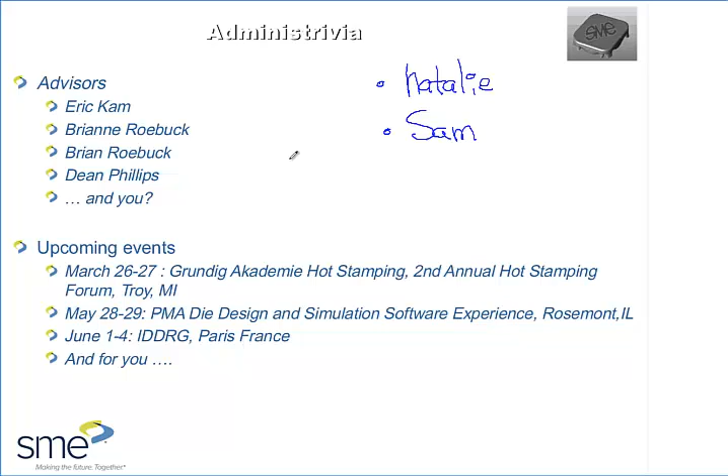So today we have, in addition to the usual suspects, Natalie and Sam. Sam has been joining us almost a year and a half — Sam, you've been coming to our meetings? Yeah. You will, if you keep paying attention like that, we might sneak you in and try to con you into becoming one of our advisors. Yeah, it's not as bad as we make it sound, but just don't leave. Okay, we won't do it, Sam.

My name's Eric Kam. I am the co-chair of the Stamping and Dies technical group within the forming and fabricating community. My co-chair is Brianne Roebuck, who you've heard talking in the background. Her father, Brian, is an advisor, as well as Dean Phillips. We are the folks who try to, on a regular basis, make sure that meetings happen within the forming and fabricating community, specifically talking about stamping and dies.

As far as calendar of upcoming events, a couple things on my radar: on March 26th and 27th in Troy, Michigan, a company called Grundig, a metalworking, metal forming supplier to the automotive industry, is having their Grundig Akademie Hot Stamping Forum. This forum, hosted in conjunction with General Motors and the General Motors supplier community, as well as Grundig Akademie, my employer Autoform Engineering, and a couple other hot stamping suppliers, is a 2-day forum that will have educational technical talks on the first day.

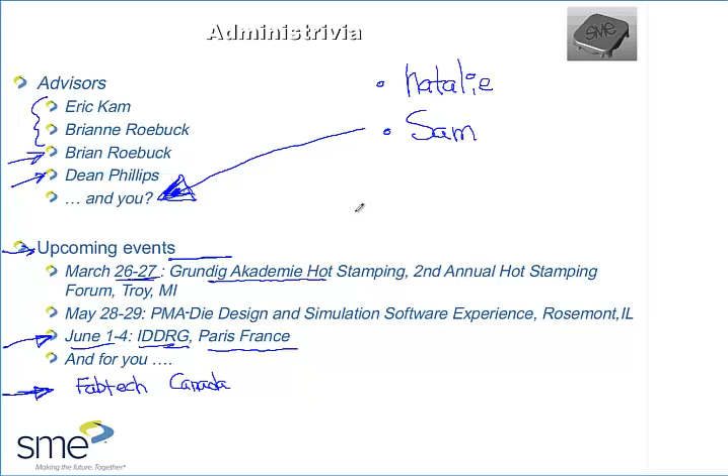I wouldn't necessarily say... I'm just, sure, if I have the links for registration or more info for those events, I wouldn't say that this community or tech group is necessarily supporting them. I just know that they're relevant to people who are members of our community. So if they didn't know about them, now they can. I will put the links up when I post the meeting minutes. How's that sound?

Okay, thank you. I thought for sure you were going to use that as an opportunity to remind us that FabTech Canada is coming up.

Well, I actually don't know anything about FabTech Canada. That's why I didn't mention it. I have not been paying attention to it, so I'm not fully up to snuff on even when it is. So FabTech Canada is out there someplace. I suppose if we Googled it, we'd find it's happening sometime. I believe it's this first quarter of 2014.

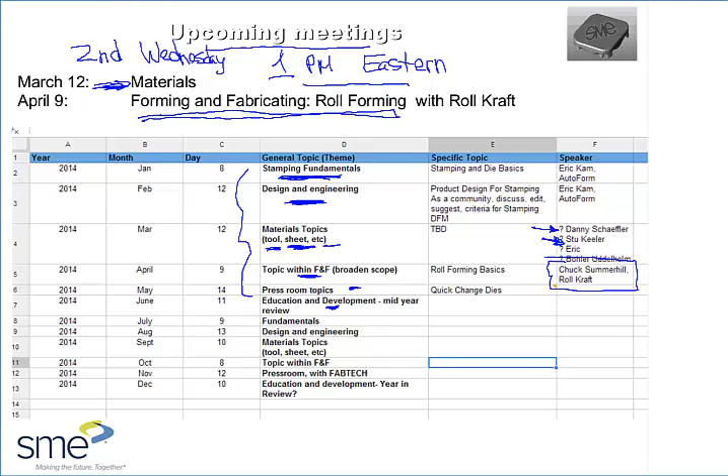I know some guys who know a lot about this. Stu Keeler knows a heck of a lot about material plasticity and material plasticity theory, being the godfather of sheet metal forming and formability. My good friend Danny Schaeffler is kind of a steel substrate specialist, bringing a lot of steel experience. We also used to have a very active member in our tech group who worked at Bohler Uddeholm, and they always talked about new advanced materials for the tools themselves. So does anybody have anything in particular they'd like to learn more about regarding materials? That big umbrella of sheet metal, the sheet we stamp itself, or the tool substrates or coatings?

Just to narrow down who I should try to rope in to be our guest speaker next month.

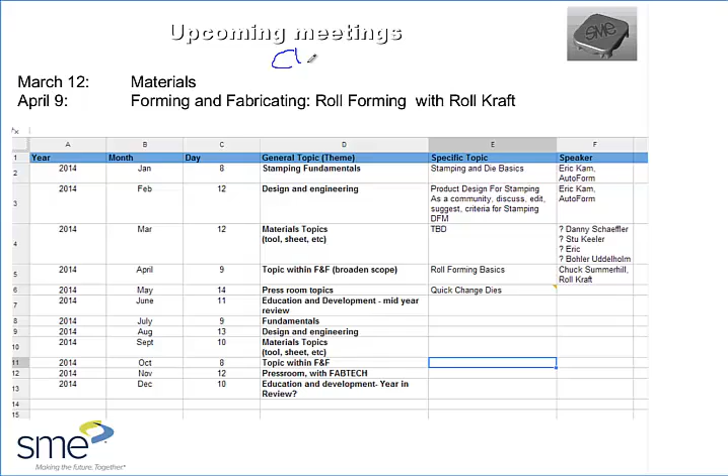Right, so when we talk about clad materials, we're talking like aluminized materials, right? Just where aluminized, galvanized. We could talk about tin plated, things like that. So all how those materials behave, and that's a great one.

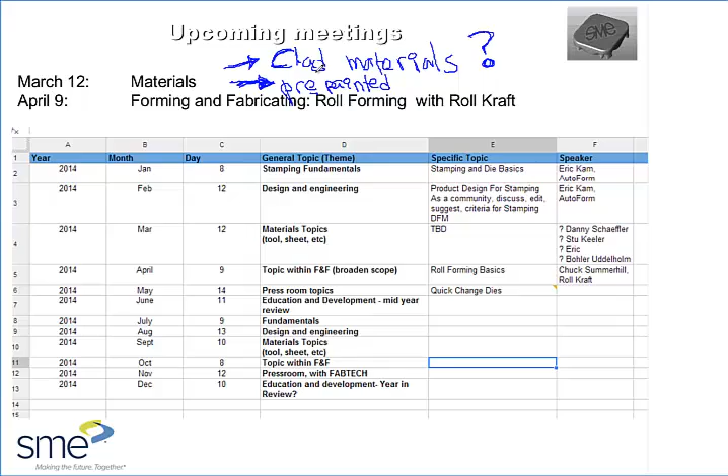That's an interesting topic. I have zero experience with that, but that's cool stuff, right? I think I know people we can talk to about getting at least some discussion going on this idea of pre-painted, pre-coated, or clad materials and their behavior, and things to expect and not expect. I can think of a couple people I might tap to be guest speakers. That actually worked out pretty well, right? Give ourselves a narrow theme to talk about, and then drill it down into one aspect. So thank you very much, I look forward to that.

Elastomers, so we could say non-metal. Okay, cool. All right, well, we'll see which direction we take, and hopefully by the time we send the agenda and meeting reminder out, we'll have narrowed it down to some flavor of discussing those materials that we stamp, whether they're non-metals, whether they're clad metals. Sandwich materials are always interesting. Patch blanks are very popular these days, elastomers too. So there's a lot to discuss, more things in the future, and hopefully I have the next three weeks to figure out who we can get to talk about any one of those topics.

So thank you. All right, and don't forget, also in April, that topic's already pretty much narrowed down. We will be talking about roll forming, so we'll be going away from traditional stamping and die-based stamping and into coil processing techniques and roll forming. Our guest on that meeting will be Chuck Summerhill from Roll Kraft.

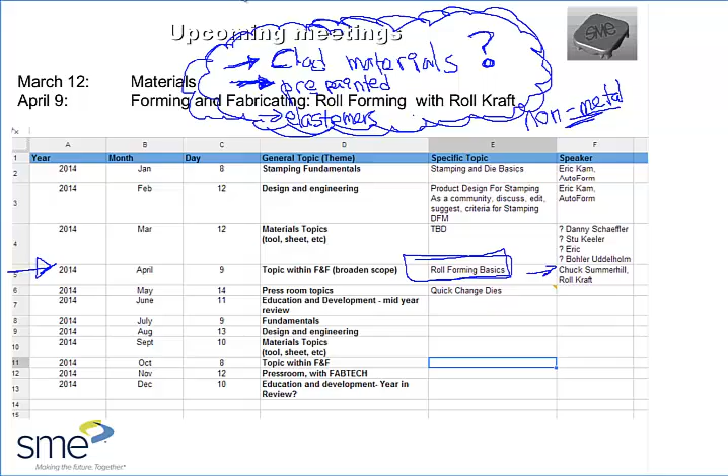And hopefully a few hundred people attending our meeting. Okay, yes. Does it? See, I picked the topic pretty cleverly. Actually, that was a complete accident. But that's during the Big M, huh? Oh, Natalie.

We could broadcast the meeting from the Big M. We could have a live meeting and a web broadcast at the Big M, but we need a meeting room at the Big M. But that would be super cool. I'm putting that on my calendar right now that I plan on doing that. So that would be super cool. So let's see.

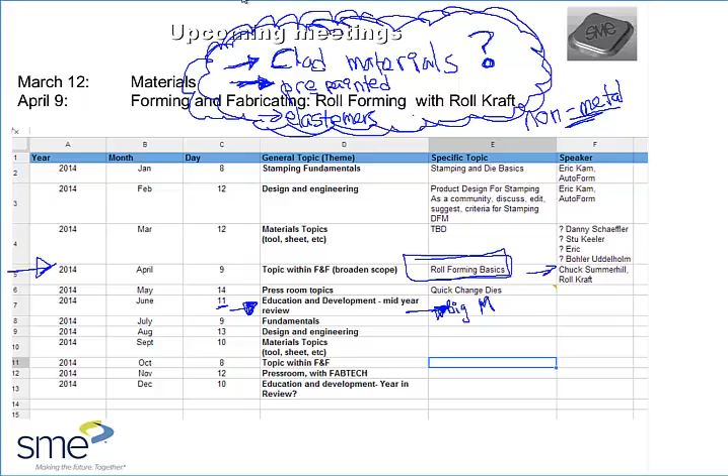Groovy, all right, yes. Okay, I'm sorry Sam, well you made it for all the administrivia, and I was just about to start the technical talk, I'm sorry buddy. Okay, all right, thank you very much.

Okay, so today's technical topic was design for stamping, right? And this was a topic triggered through some questions from Brianne and a couple other folks who said they're new to stamping and wanted to know more about criteria or guidelines on how to recognize whether your part is a candidate to be stamped, if it was a part that was perhaps being formed in a different method or format.

And so I went through and gathered some criteria that I used to use in a course I taught at SME probably about 12, maybe 14 years ago. We used to have a class at SME called Design for Stamping Manufacturability. Myself and Jerry Poole, who at that time was a retired GM employee, put together this course about criteria on recognizing if your design was in fact suitable for sheet metal stamping and design for manufacturability.

One of the things that spurred us into putting that course together was that a lot of times people talk about design for manufacturability, and they're actually usually talking about design for assembly, right? Or sometimes they're talking about machining, or other manufacturing methodologies. We found that the design for manufacturability standards in those very generic books were not necessarily suitable for sheet metal stamping. So we put together our own guidelines, with Jerry working from his experience at GM.

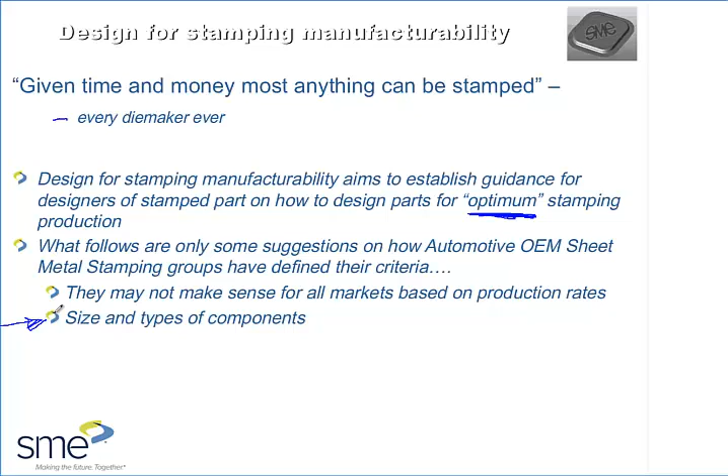These criteria are not going to make sense for all markets based on the different production rates, production targets, or quality targets, and they're not necessarily going to be universally applicable due to the size or type of component. I just wanted to put out what kinds of standards and guidelines people use to talk about sheet metal stamping, and then once we establish a baseline, we can talk about how those rules would change if we knew we were designing a different commodity type for a different manufacturing vertical.

So general definitions, just to be clear: when I talk about dies, I will be talking about the tool that is used for the serial production of sheet metal stamped parts. If I use the word process or processing, we're talking about the sequence of operations used in a die or series of dies to transform the sheet metal into a value-added product.

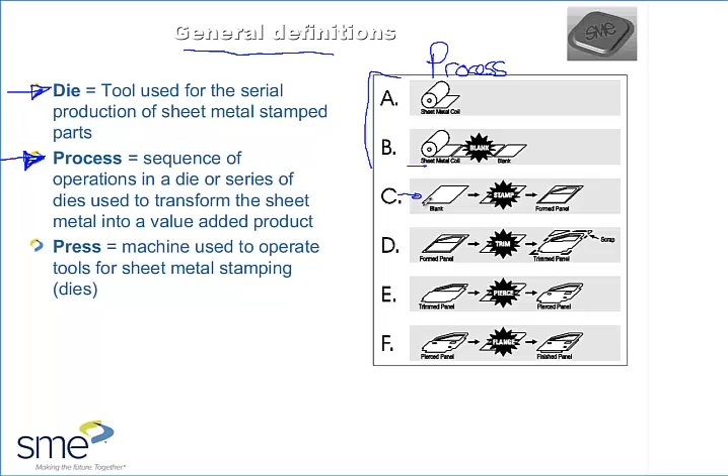In this illustration on the right-hand side of the screen, I've shown a process that takes coil stock, chops it into blanks through the use of a stamping die, takes that flat blank, gives it some shape, uses a cutting operation to trim it, uses a cutting operation to pierce some holes in it, and uses a flanging operation to bend over the edges of the material. This defines a process. I would actually call this a 1, 2, 3, 4 die process, where there are 4 unique tools specifically used to process that flat blank into, in this case, a car or truck door.

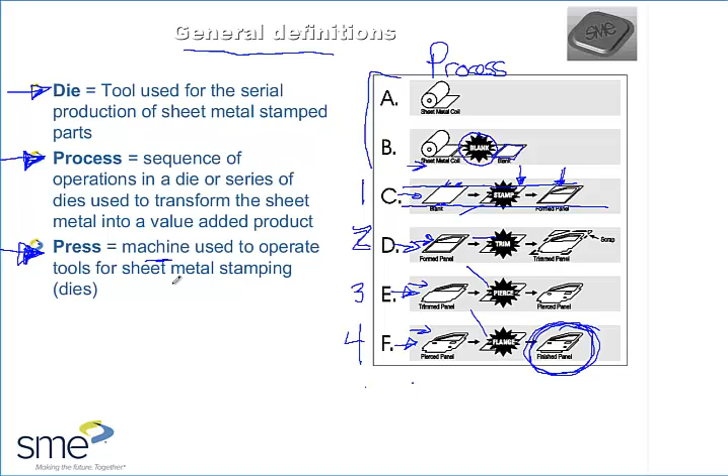All right, and finally, a basic definition. If I talk about press, press direction, or press ram, we are talking specifically about the machine used to operate those tools we use for sheet metal stamping. So the press is the device that operates the dies.

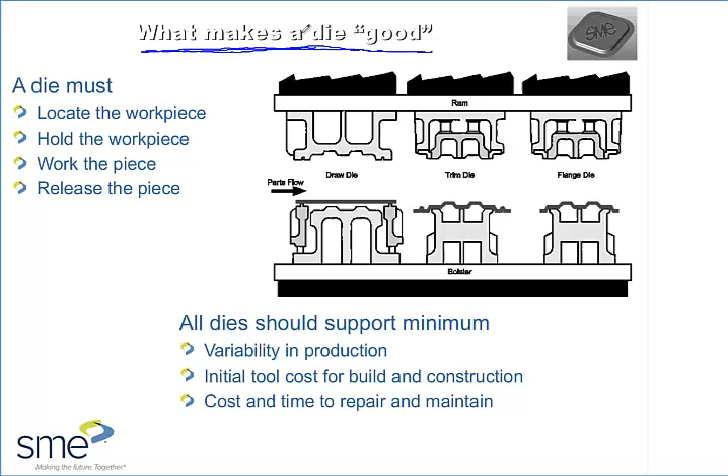One of the things I went through when I first started working in the metal forming industry is I worked with lots of really clever people from diverse backgrounds. I worked with tool and die makers with 30 years of experience at a single site, big-brain PhD types applying an academic background to sheet metal forming, and one of the world's foremost experts on die casting who was dabbling in sheet metal stamping because he found it an interesting problem with interesting variations.

When we started talking about what determined whether a die or the die process was good, we decided that any die must do these four basic things in order to do its job. So anytime we think about a die for stamping sheet metal, it should have some way of locating the workpiece, the piece of sheet metal, inside it.

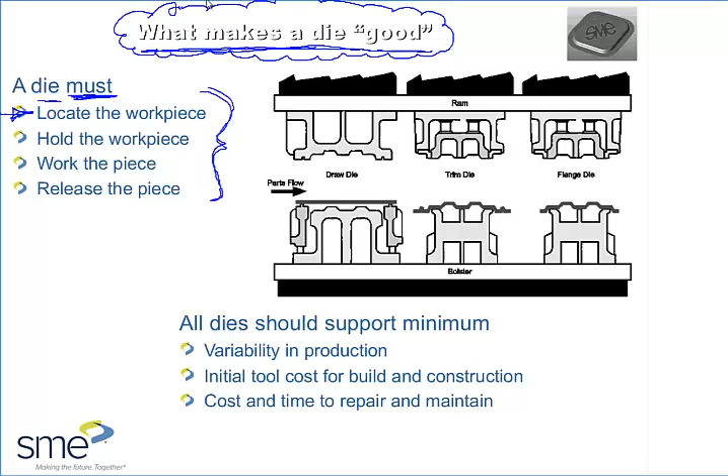If you take a look at this cartoon on the slide, you can see I've taken this blank of metal and shown it resting on top of the forming die. This die can't do its job well unless I create some basic or very complex mechanism to make sure the workpiece is properly located inside the forming die or draw die. Whether or not this die works well will be driven by how well I can locate that workpiece.

Every good die has to be able to hold the workpiece. That means if I want to do some cutting in the second operation of this cartoon, you can see I have areas adjacent to the places where I want to cut and trim off excess or scrap material. I need sufficient area to grab onto or hold the workpiece, and many things that go wrong inside a stamping die regarding quality or repeatability could actually be the fault of not having sufficient area in the design of the part or process to hold onto the workpiece as we're doing the work.

Of course, the die's got to be able to do the work, right? It has to work the sheet metal. And when I talk about work, I'm talking about cutting, compressing, shearing, stretching the metal - putting energy from the press ram through the die into the material.

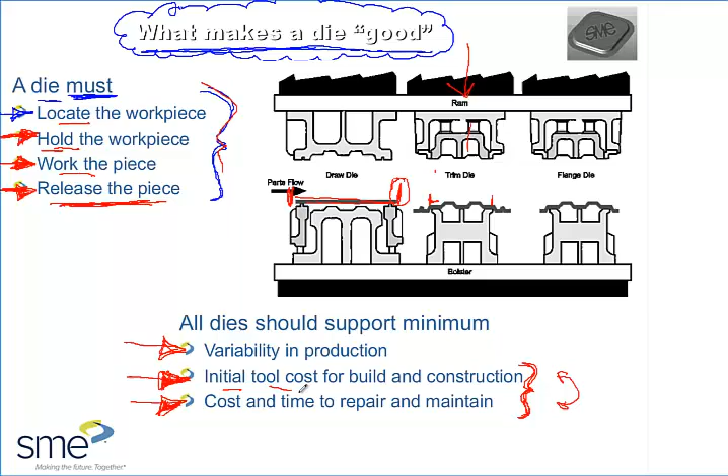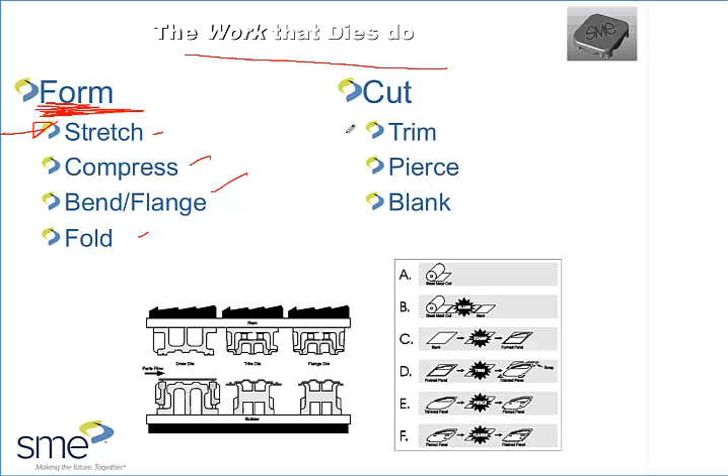So the work that dies do, we discussed this very briefly before, and this was one of the topics that Brianne went through in the January meeting. I'm generically going to say pretty much dies do two kinds of work. They're either forming the sheet metal by stretching it, compressing it, bending it, flanging it, or folding it, or...

the dies are cutting the material, which could include trimming, piercing, or blanking. So one of the things that we look for when we're looking at a product and trying to determine whether or not that product is a good candidate for stamping, one of the things that we look for is whether or not that tool, that part, is one that could be formed inside of a die that's going to facilitate the use of simple in-die work, right?

So the most simple way to do work inside of a die is to attach your upper tool to the press ram, attach your lower tool to the bed or the bolster of the press, and bring the ram down along a simple linear vertical axis and do the work to that piece of sheet metal. Now, of course, when you start looking at parts that have a bit more shape to them...

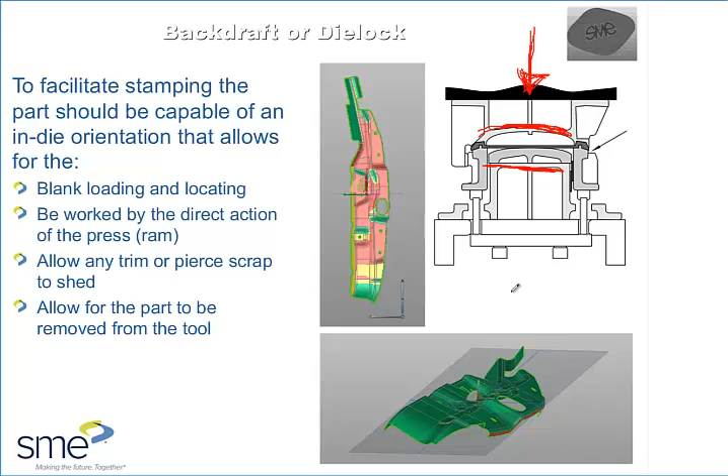like the part that I have illustrated on the bottom of the slide here, you can see that there's this area that I've color-coded red in that illustration. What's actually happening in that part is that the areas that are in green are areas that are easily accessible along that vertical action of the press. So those are areas that are easy to form in a conventional stamping operation.

The area that is curled underneath, this area that I've circled right now, cutting a section through there, this geometry is bent underneath and would not be accessible to the press ram. Now this is what a lot of people would call a backdraft or die lock condition. And when we talk about things that are easily done in serial stamping and high volume stamping production, things that have a significant amount of backdraft are difficult or challenging to form in a repeatable operation.

Right, so earlier Doug asked about progressive dies. When people talk about progressive dies, this is one of the things that they look out for to determine whether or not this is easily done in a progressive die. If I have this geometry that's bent back on itself, imagine what the tool that would have to form that would look like.

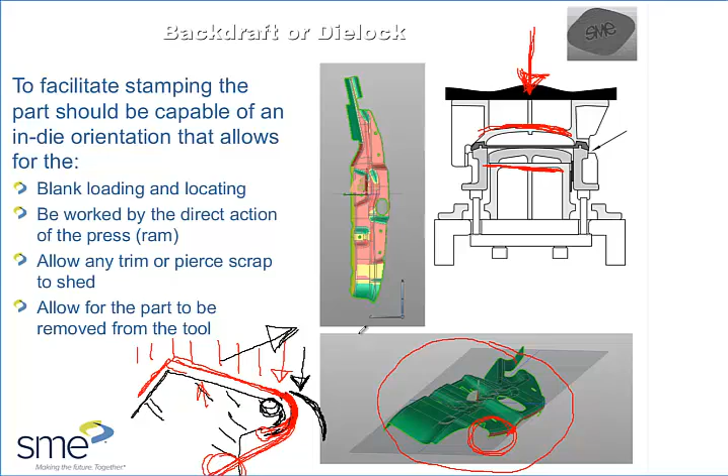And that's where you usually run into a little bit of trouble. This is also one of those things that causes a lot of trouble when people consider prototype versus production. The number of times I've heard people standing there with a prototype part in their hand telling the tool and die guys, don't tell me it can't be done, because I'm holding the prototype in my hand. I have a piece of metal in my hand that somebody made to look exactly like the thing that you're telling me can't be made.

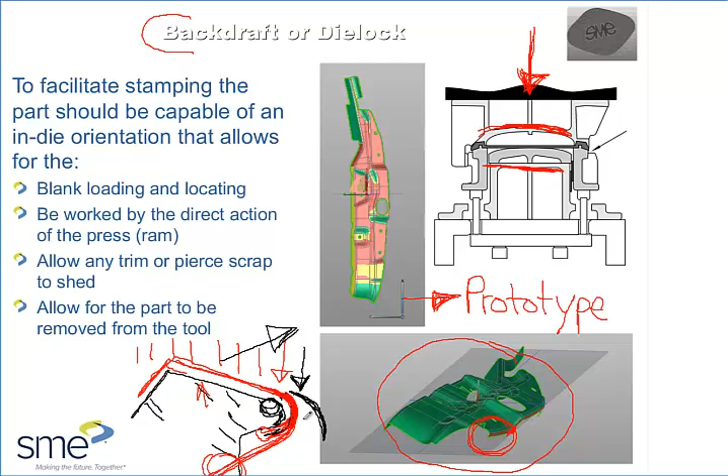A lot of times prototype parts are parts that are being able to be done in a process which is maybe not conducive to that serial production. So sure, I can make 5 of these at a time in a prototype shop. You want to make 5,000 of those in an hour? I don't know if I can pull that off because I'm going to use a different methodology.

Some of the things that can happen regarding this product design: it is possible, if we have this geometry I've sketched in this green section here, you can see that this part has a little bit of backdraft in that section. One way that a person can get around this backdraft condition is by using a cam. Rather than relying only on the vertical press action, they could use a cam, which is just a series of inclined planes that take the vertical action of the press ram and reorient that work along a different axis. That would allow you to form this backdrafted geometry. This backdrafted geometry would still need to be somehow removed from that die, but it still is a way of getting that shape. So the shape is in fact possible.

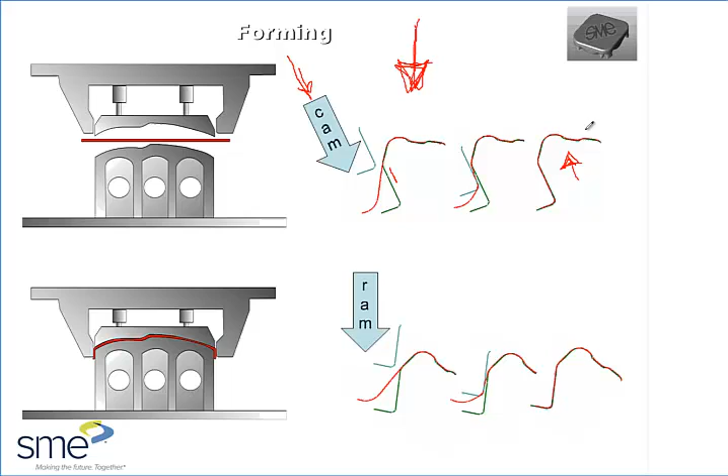There's nothing really prohibiting that shape from being generated, but it's something that maybe is a little bit more expensive to do, or perhaps takes a little more time. And when things take a little more money and a little more time, those are the types of things that make manufacturing engineers say, we can't do that.

Another alternative that is always available is if I reoriented the part inside of the tool that was going to be used to make that. Instead, I took this exact same section and just rotated it a few degrees over. Now I have the ability for the press ram to fully have access to that geometry to form it without having to worry about introducing a cam.

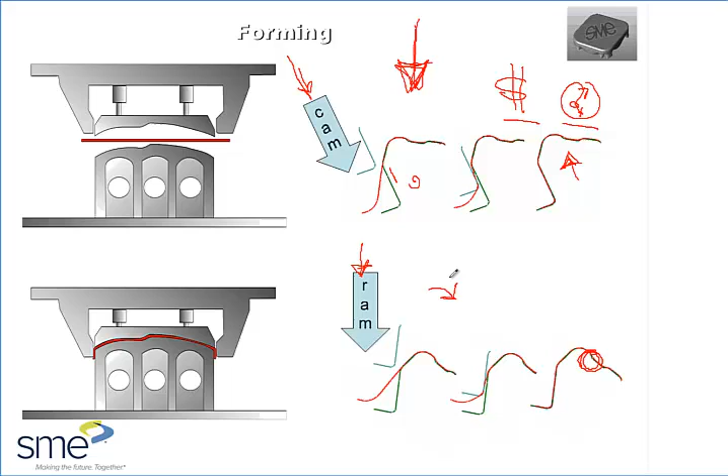Now people would have to be curious if this little embossment section here was still capable of being formed in that same operation, or would they have to use a sequence of operations to spread that work out in a progressive or transfer type format. So it can be done. It's not impossible, but it is something that makes stamping a bit more difficult.

These are a couple pictures that came directly out of the old SME course for Design for Manufacturability of Sheet Metal Parts. This was one of the things we used to recommend to people. If you have your part and you orient it in a typical draw or in-die stamping orientation, one of the things we were trying to achieve is that these wall angles of the part would be 6 degrees from vertical or more.

So if this is vertical that I'm sketching right here, we want to see that this included angle was 6 degrees or greater. That would assure that our parts were being able to be formed using the direct action of the press without having to employ retipping or employ the cams. And that would keep the manufacturing environment optimal for what that automotive OEM considered normal business.

When we saw that these wall angles were tighter than 6 degrees, then what we saw is that increased the die cost, that made the dies a little bit more difficult to build and maintain. It also had this other effect that it turned out 6 degrees was also the optimal shape to have if we were racking these parts and stacking them on top of one another.

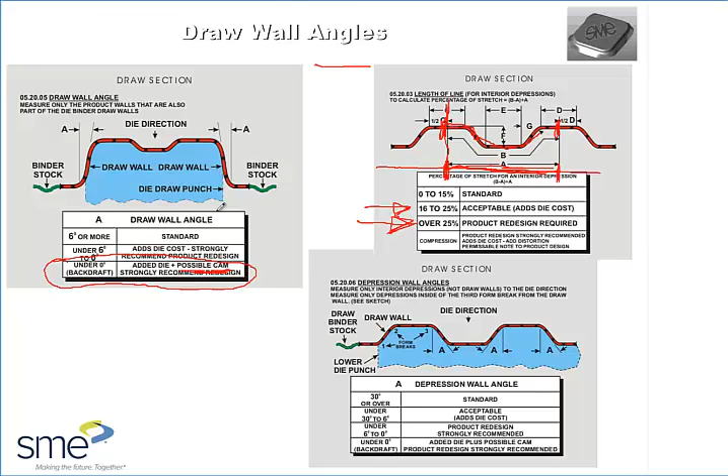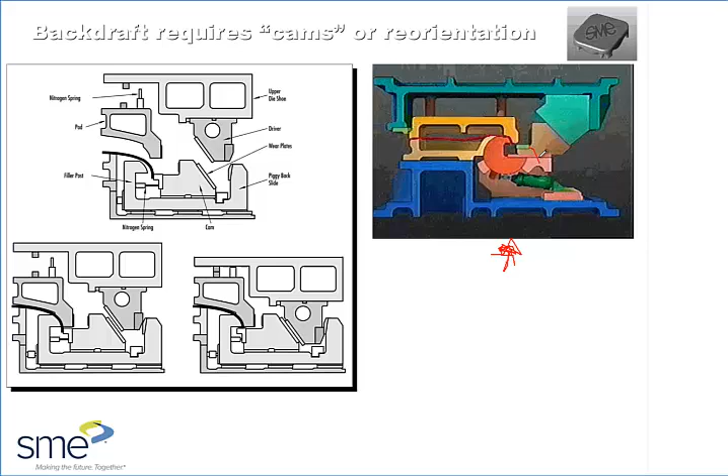That makes a clearly more expensive die. Now, imagine this is an automotive component, like this would be used quite commonly in your fender. If you can imagine, the show surface of your fender is on the top of this die, and that area being bent underneath is the area you're closing your hood into, the shut face of your hood. This tool adds a lot of complexity, but that's geometry that's 100% necessary for the function of a fender. You don't have fenders if you don't have that surface going vertically down into the hood's shut surface.

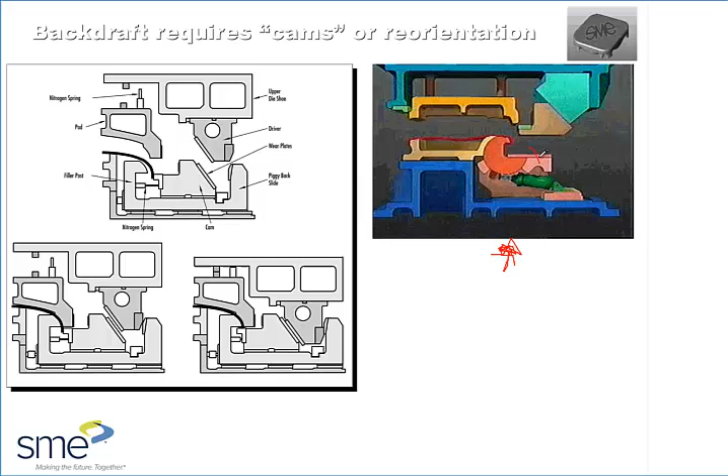So this is one of those things where there are criteria we had. We told people not to design these backdrafts, but it just made for a way to do it. Given enough time and money, pretty much anything can be stamped. The picture on the left is just an alternative way of getting that same type of geometry in.

However, you'll notice that without the rotor, this area we're using to locate that backdraft, and also the area that has to transit out from underneath the flange in order for the part to be unloaded, now has a much larger footprint of the die in order to do what was being done in that small rotor area. So this is an innovation that came up recently, and this is one of the ways we're able to make more complex shapes in fewer operations in automotive stamping operations today.

Other guidelines that are common when people talk about whether or not things can be stamped is cutting angles. I've got that illustration of that part I showed earlier. You'll notice I've highlighted all of these boundaries around these little holes, as well as the boundary around the part perimeter, and it's shaded green, yellow, and red. This is an output from an engineering software I use every day, which measures the slope of the area perpendicular to that part boundary, and what it's measuring is the trimability or cutability of that material.

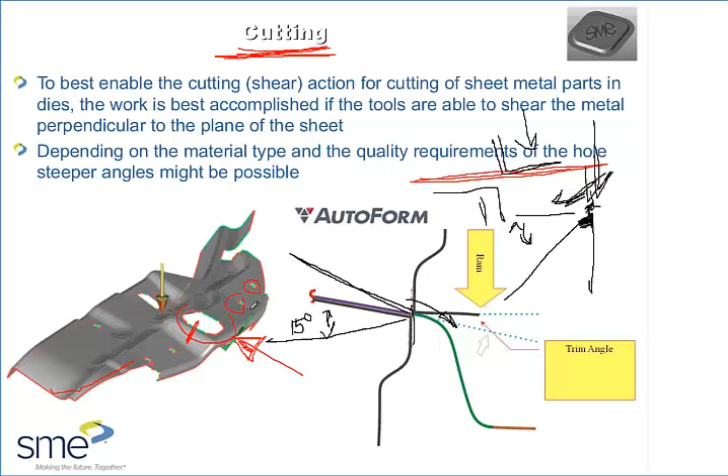When we talk about a traditional or conventional tandem line of stamping where perhaps we're using robots or pick and place automation, for the part I've illustrated here - if we just rotated this part a few degrees counterclockwise, all of these steep areas shown in red as being untrimmable would now be closer to horizontal, and we'd be able to trim them just fine using the vertical motion of the press.

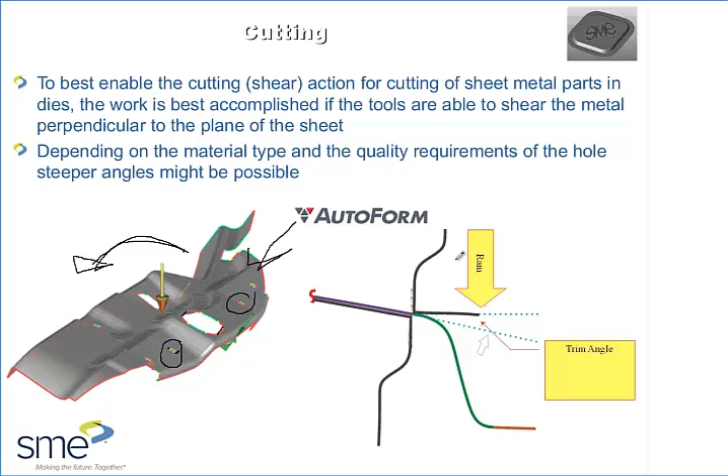However, if we're talking about high-speed transfer presses or progressive presses, the inability to reorient the part from one operation to another might limit our ability to reorient the part to achieve trimming. So again, this is one of those things where the die processors I'd work with would say, we can't pierce that hole or we can't trim that hole. It's not impossible - it can be done. We could introduce cams that travel along an alternative axis, and that could possibly do the piercing or the trimming, but it's something we perhaps were not willing to do.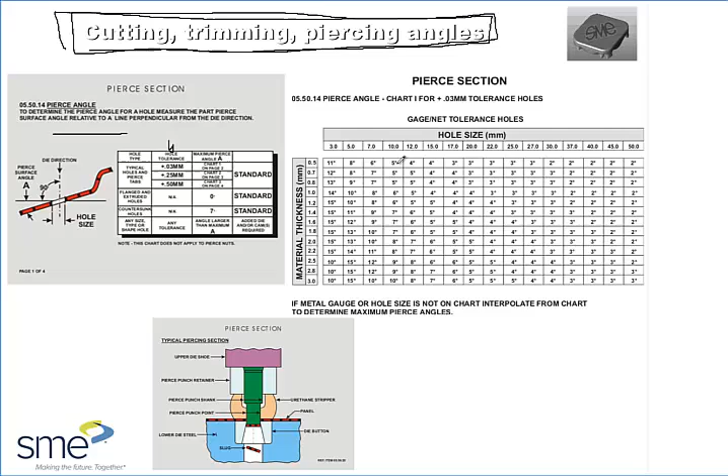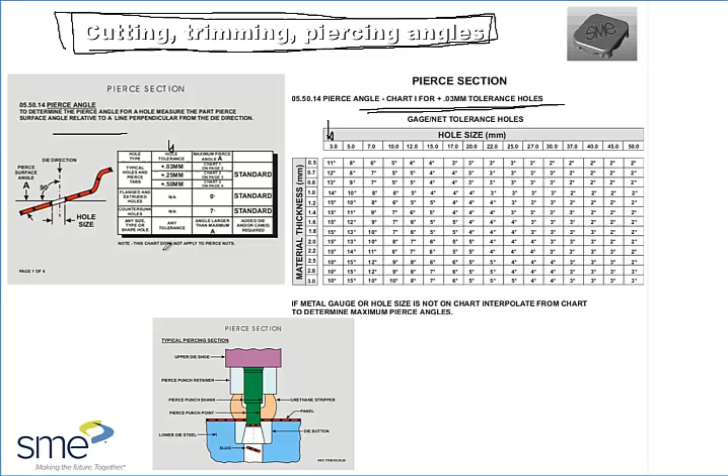Similarly, I have a few tables that were published with SME when we put together this Design for Stamping Manufacturability course, where we would say, here are some recommendations for various holes of various hole tolerances, and what would be the acceptable trimming angle relative to that. This was for holes with a given plus-minus tolerance, given a certain hole size. Here were some limits of piercing angles that were possible in order to assure that we had the right size and shape hole.

Trimming operations like this using cams bring up many of the issues we talked about with what it takes to be a good stamping. One challenge is getting this trimmed piece of scrap out of the die. When I said there were 4 things every die had to do, they have to locate, hold, work, and release the workpiece. They also have to release the scrap. With a complex die with cams moving around, it's sometimes a real challenge to make sure the scrap makes its way safely out of the die without getting trapped or ruining your tooling.

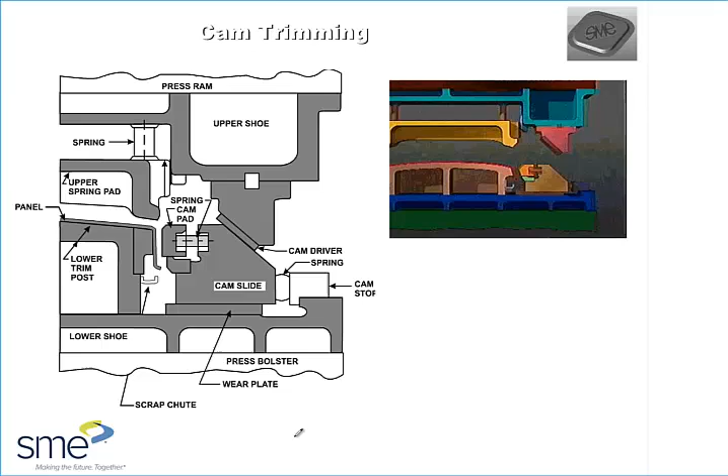We had guidelines for piercing. Believe it or not, there were guidelines on how close together we recommended having your holes. You don't want your holes too close together, because if you imagine the tools that are going to be used to do the piercing, here's a picture of a pierce punch retainer.

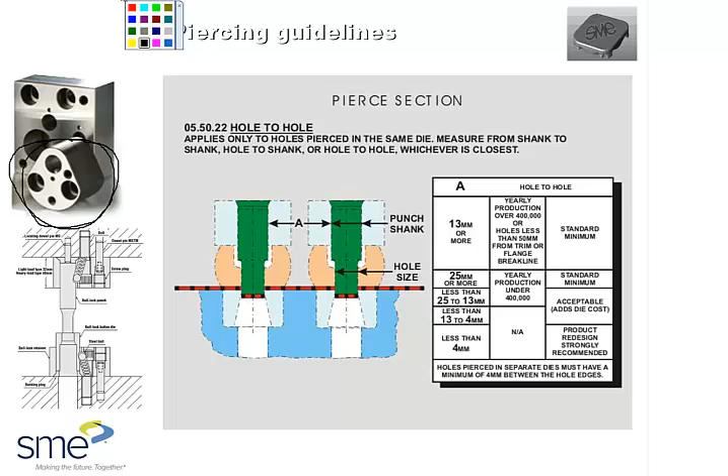If every hole that we're piercing is using one of these retainers to hold the pierce punches, there's a critical mass of number of holes and closeness of holes you can achieve before you have to go to a custom made or custom fabricated retainer.

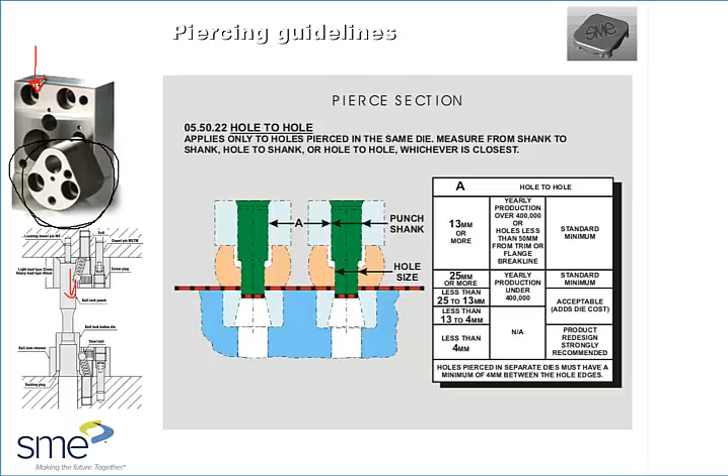Because the company I was working with at the time, documenting these manufacturing standards, was targeting high volume serial production of automobiles, they tended to err on the side of needing to use off-the-shelf, standard catalog components. Every time we had to custom fabricate something, that was seen as a huge increase in potential cost, not only for the initial tool build, but if we break one of these retainers and have to replace it, if it's custom made, we'd have to keep 2 on hand at all times, or risk shutting down production for a long time waiting to fabricate another one.

So that was another reason we had to make guidelines for our product engineers, telling them don't have your holes closer together than, I believe it was 2 times the diameter of the hole sizes—that was one of the standards, the hole-to-hole standard. We don't want them too close to one another.

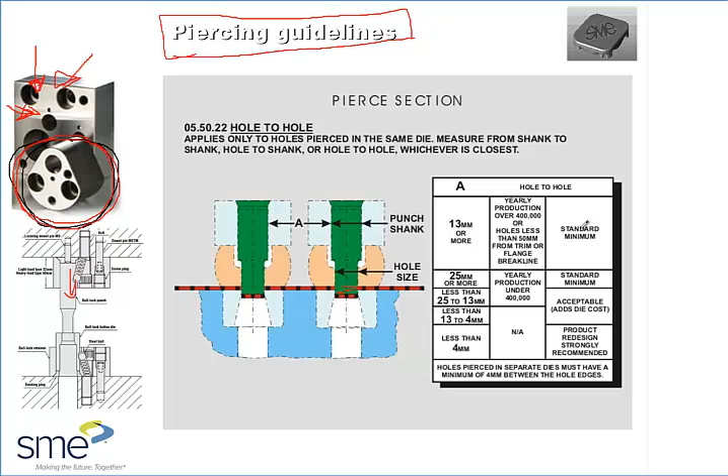We don't want the holes too close to a trim line either, because then we wouldn't be able to use standard off-the-shelf piercing buttons. If the trim line's too close to that pierced hole, next thing you know we have to make custom-made inserts for our stamping operations. So these became things we would use to educate our product engineers on how we were designing our parts to best suit our manufacturing environment.

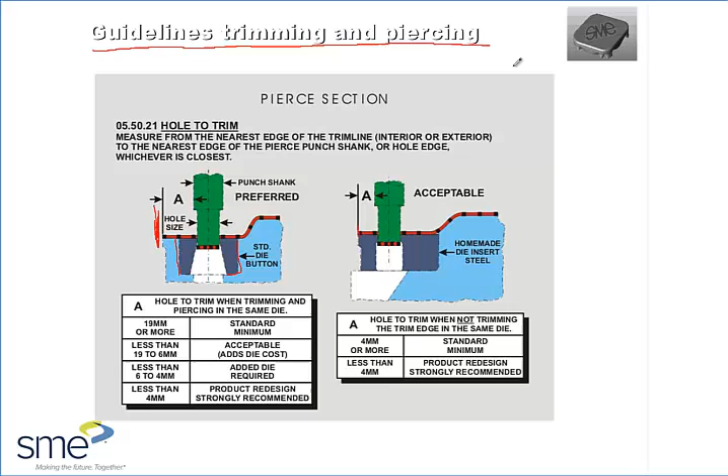A lot of stampers I know, and a lot of smaller shops—I'm sure Brian and Brianne are looking at this thinking, well gee guys, you're being very inflexible. Well, that's why smaller shops like yours exist—you have flexibility and fewer rules about what's possible than a giant, massive OEM stamping environment would have to live within.

We had guidelines on piercings, or different ways to design piercings. Here was an example where somebody needed a hole through the part, but the hole was on this angled surface, and otherwise we would have to have a cam come in and pierce that hole.

It turned out if this hole was not critical to its function, we could create a little localized depression—a frog eye depression—and put the hole on that. Making that recommendation not only made piercing the hole easier, but made the part function better. The product engineer was able to design exactly the embossment needed to get the hole exactly where they needed it, with a nice tight roundness tolerance for that hole. So that was kind of a win-win.

We had guidelines on if you have holes on complex surfaces, things that are possibly going to increase the complexity of your stamping or not. So is there any way that we could come up with kind of a universal guideline for stamping manufacturability?

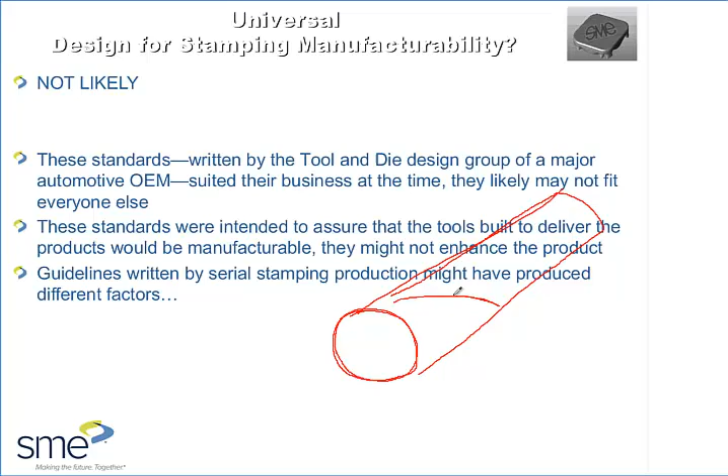Probably not, right? Because I already know that Brian is probably thinking about dies he built that were cutting slots in tubes. These slots, if I remember right, were for the beater brushes of a vacuum cleaner. Not only were they slots, but they actually went around the curvature of the cylinder. This probably would have violated absolutely every one of the die standards of the tool and die shops that we put together these guidelines for.

We would all say it's impossible, you can't do it. Get yourself a laser and cut that stuff, right?

Yep, it's a very special die, a very special knife. When we think about the things I discussed before, a big challenge for you was most likely getting this cylinder after it's pierced off of the tool or fixture used to pierce it, and making sure the scrap was safely released.

So anytime I think about can I stamp that, I really try not to think so narrowly like these standards, but I always think about those four things I said. We have to be able to locate the workpiece in the die. We have to be able to hold it. We have to be able to do the work. And we have to be able to release it.

If we can work our way through using our ingenuity and creativity on how our dies achieve these four things, and achieve them well, then we have a sheet metal stampable part. And if you can't do this thought exercise with your product geometry and tooling geometry and come up with reasonable solutions for all these things, that's when I say probably the part can't be stamped.

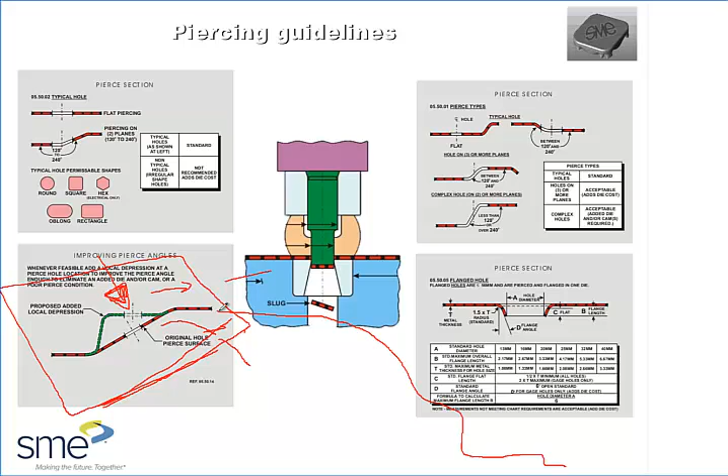So again, it's really hard to come up with some sort of single guideline that would apply to everybody, and that's why we ended up simmering it down to those, the only real rules. Worry about doing that. And if it costs you more money than you're willing to spend to accomplish one of these things, then you know you have a design that's a candidate for redesign.

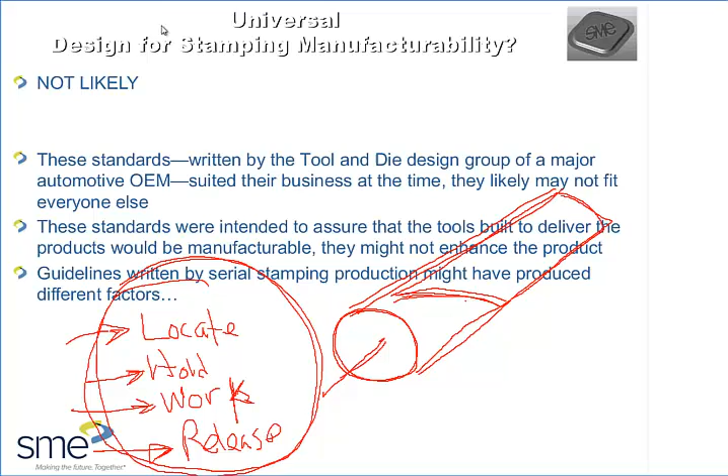And it shows the difference in what companies are willing to do, because of how fast you have to get the part done, how many reviews you need, and how easy we can get a different job sometimes.

One of my customers right now, if they were faced with this particular design on the lower left, they would tell me no problem, because they're going to have an in-die hydraulic piercing operation. When this rest of the geometry was being formed, as soon as that bottomed out and reached bottom, they would come in with this in-die hydraulics, pierce that out, no problem, retract the pierce punch out, and pick the part up and move it on its way. And they're like, there, see, no problem. One hit, we put the shape in, and we put the hole in.

And I'm like, well, okay, that works for you guys, but not a lot of my other customers would be willing to do that. They're not going to put in die hydraulics that lowers the stroke rate from, instead of doing a stroke rate of 20 of these parts in a minute, now they're making 3 in a minute because they got these in-die hydraulics doing piercing operations in the same hit as forming. And they said, well, that's our business model, that's how we live, so that's how we do it.

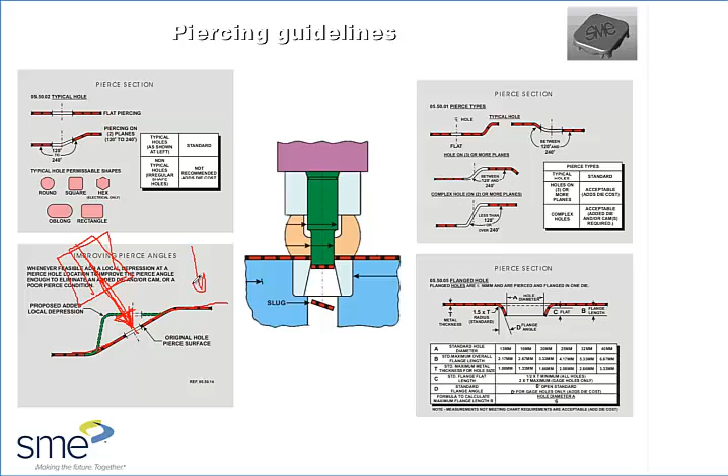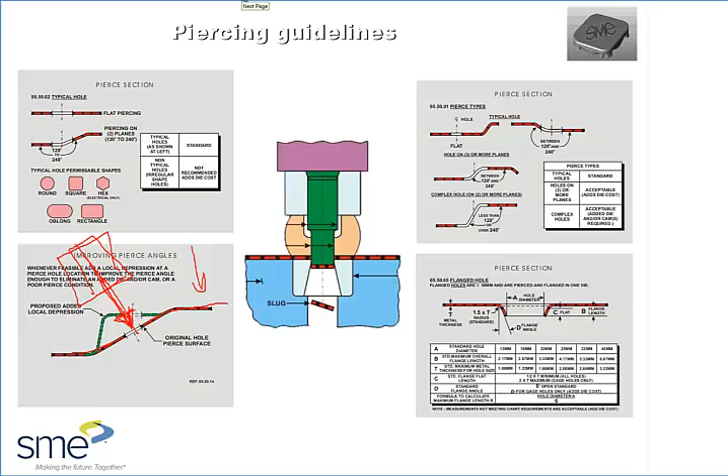Cool discussion. I've got one other little angle on die design. The place that I worked for, we had limited size of our presses, so we could only use limited size die sets. And this one in particular I could think of, they jammed, in my opinion, too many stations into one die, and it was using cams.

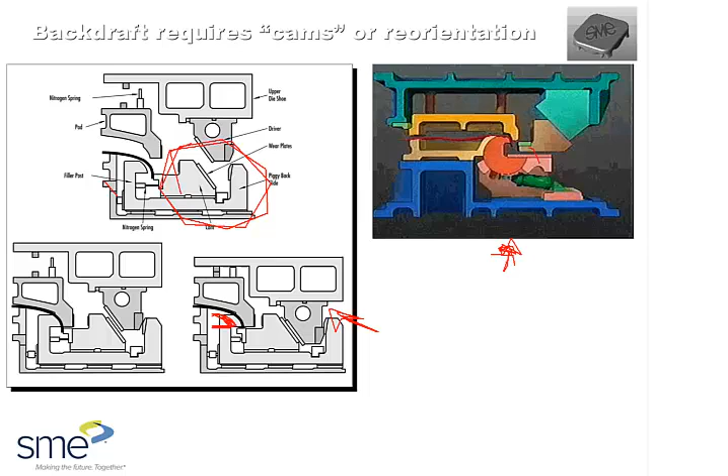Right, so given enough time and money, we can make anything work. Whether or not that ends up being worth it is always a challenge. Other things I've seen where design decisions were made in order to achieve certain shapes.

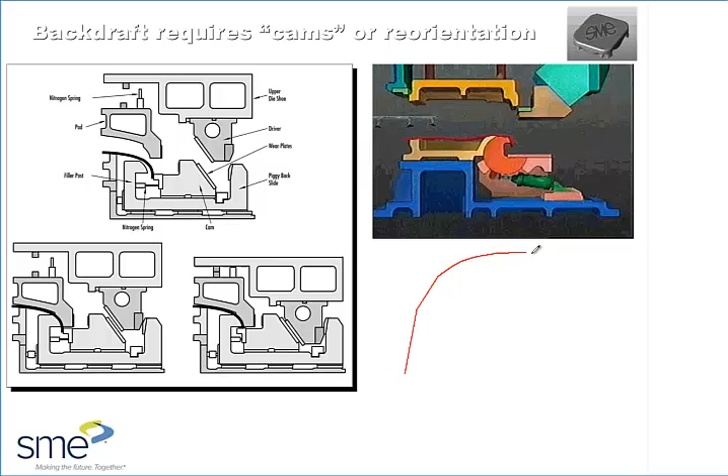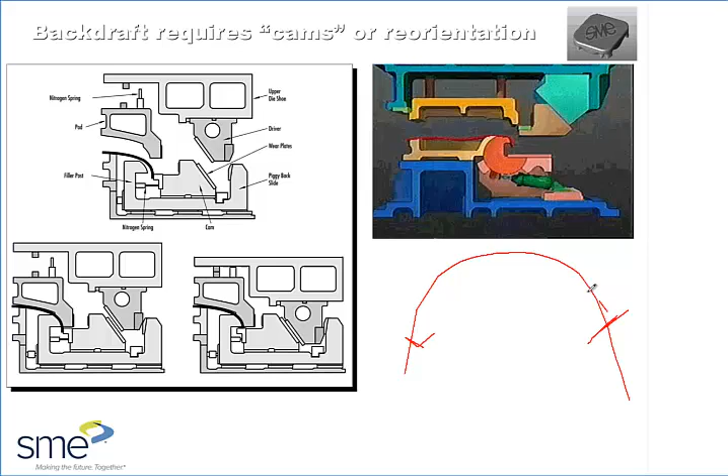This rotary cam, I went back to the rotary cam picture that we showed earlier. One of the general rules is these rotary cams, you can only use them on relatively straight brake lines. You would never want to use this on a curved brake line, let's say in the area on the nose of an automobile hood where there's a lot of plan view curvature. One time I've seen them apply these rotary cams to a hood that had a rather pronounced round bullet shape to the nose, and they were using rotary cams from about 10 o'clock to 2 o'clock on the arch of this nose. And what ends up happening with these rotary cams, they have to rotate cylindrically.

They ended up with, I believe, 15 of these rotors spaced across that curvature of the nose. And they had to be timed to rotate in a certain sequence and rotate out in a certain sequence because they would kind of key into one another into that finished curvature. And that took the production rate of this particular product from a targeted around 10 strokes a minute down to about 5 strokes a minute, cutting their production volume in half. So it cost a heck of a lot more money to form that one product than it was really intended to. So yeah, it can be done, but not easily.

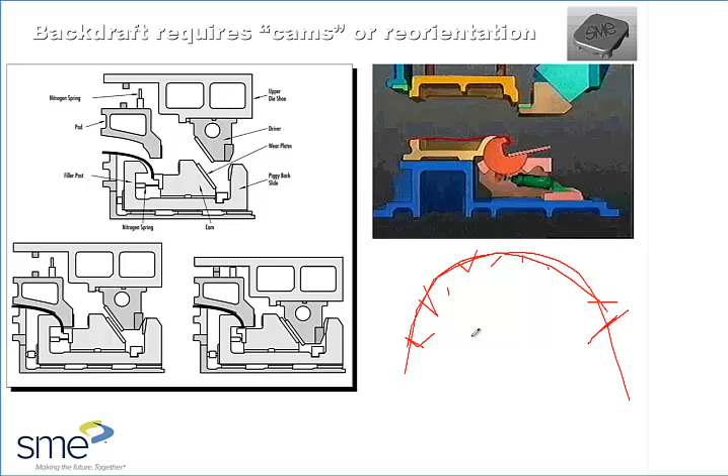Cool, my other comment is I love cam technology, and it feels like a lot of this stuff has been taken away by electronics. I'm glad to see my love of cam technology isn't going to put me at a disadvantage. Simple mechanical cams and the application of that basic mechanical principle is just super sound.

We had a bunch of these in-die transfer units at one of my customers, quite a while back, more than 15 years ago. They were all cam driven as opposed to servo driven, and they never ever had a bad automation or transfer crash because it was pure physical closing of the die that pushed those in-die transfer units into position, and when it opened, it pulled them out. They went away from that physical cam behavior to a servo behavior, and then all it took was a minor programming error, and you had the servo motors slamming the expensive pick and place fingers of the transfer into your expensive dies. You don't have those problems with a well-designed cam.

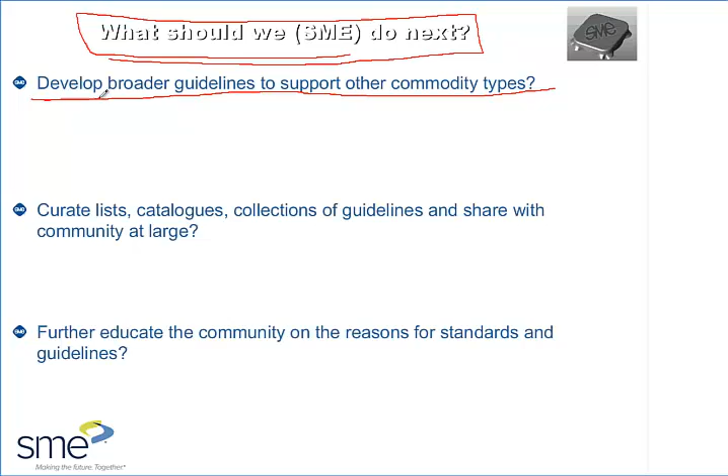All right, so to wrap things up, since I kept you guys well over the normal time span - what can we do next within SME? One thing I'll be doing is taking the guidelines that I have and putting them most likely on my blog area, opening them up for comment, questions, etc. Possibly using that as the basis to try to drive broader or narrower definitions of those guidelines to support other commodity types.

I also invite anybody participating in today's meeting - if you've seen similar guidelines, standards, catalogs, old die design guideline books, other people's blogs, or books that make recommendations on how to do things like this - share those with us within the community, and we, the members of the Stamping and Die Tech Group, will help curate and share that knowledge with the rest of the community at large.

Hopefully this gives us an opportunity to educate our community more on the reasons for standards and guidelines. If I didn't discuss the reasons and background behind those illustrated guidelines I put up today, I might really upset people, because that was one company's methodology to arrive at its goals. For your own company and your own goals, it's better if we understand the logic behind how those were defined and why those guidelines were picked, as opposed to just knowing what the numerical guideline was.

What other questions, comments, or snide remarks from the Peanut Gallery today? No, thank you, it's very interesting - new information. Thank you very much, Doug. I'm always glad to hear from you, and I'm very much looking forward to hearing more about this.